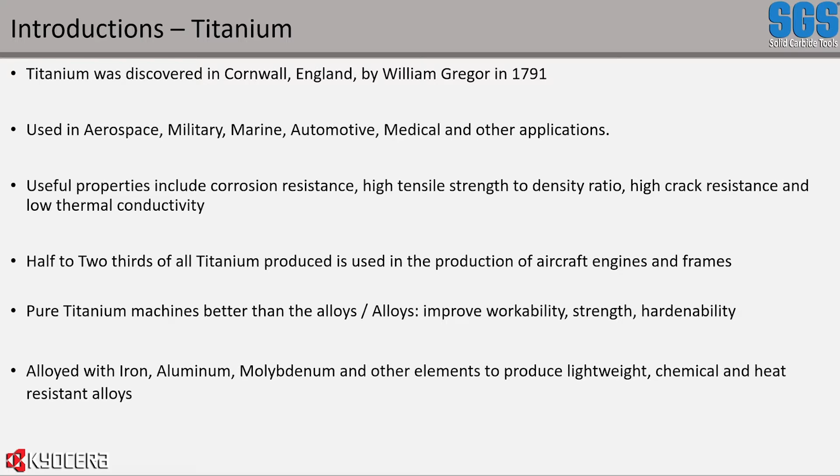There are 3 different phases of titanium, which we'll cover in a second, but there are many different groups within that as well. The composition of these materials can vary, producing different properties that are advantageous to specific applications.

The first phase of titanium alloys is the alpha phase. This is pure titanium. It's pretty easy to machine in terms of titanium, but it does lack some of the good things that the alloy phases do give you. These generally don't respond well to heat treatment, are very weldable, and are commonly used for airplane parts, as well as more temperature variation parts, so chemical processing and cryogenic applications really lend themselves to those niche areas of manufacturing.

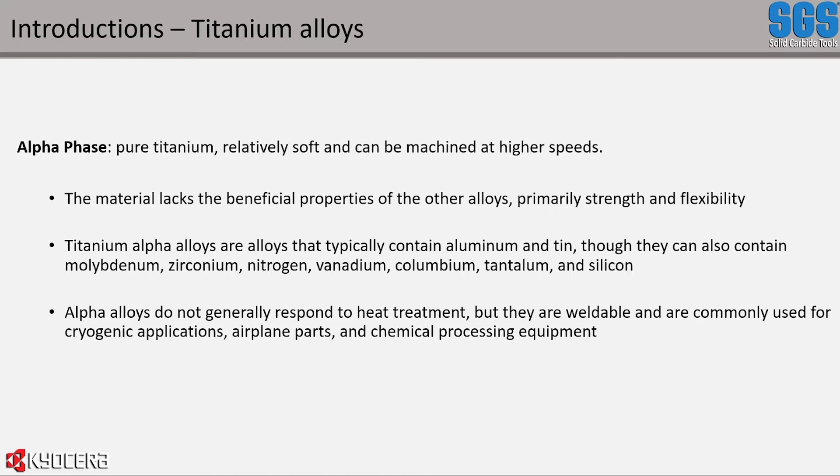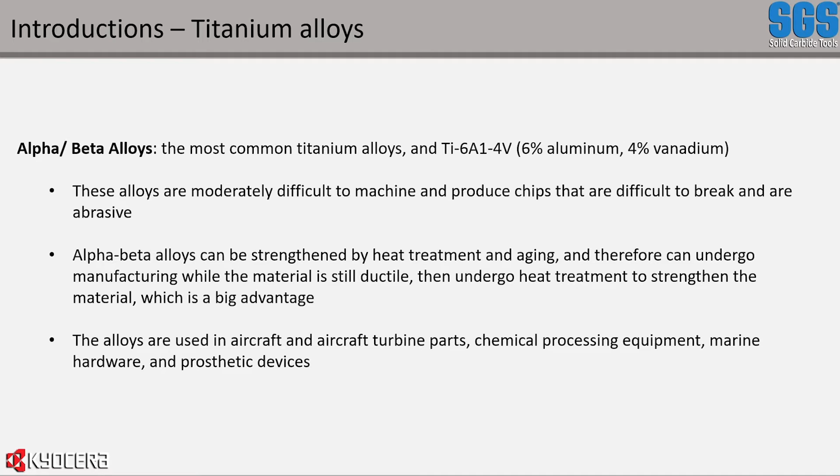The second phase is the most common: the alpha-beta phase. The most common titanium of all is the one most people are probably familiar with, Ti 6Al4V. This is a widely used material in the aerospace industry. It's great for engine components, airframe structures, landing gears, and it's also got great corrosion resistance, so it's good for marine applications where you're encountering salt water often and other chemicals that would otherwise affect other materials negatively. The final phase is the beta phase.

These are harder versions of titanium. They have higher levels of molybdenum and vanadium in them, which does make them more difficult to machine. They are becoming more common, especially in aerospace, as engines are developed to run at higher temperatures and higher pressures, so that requirement for higher material properties is increasing constantly. They're also used for heavy duty purposes on aircraft.

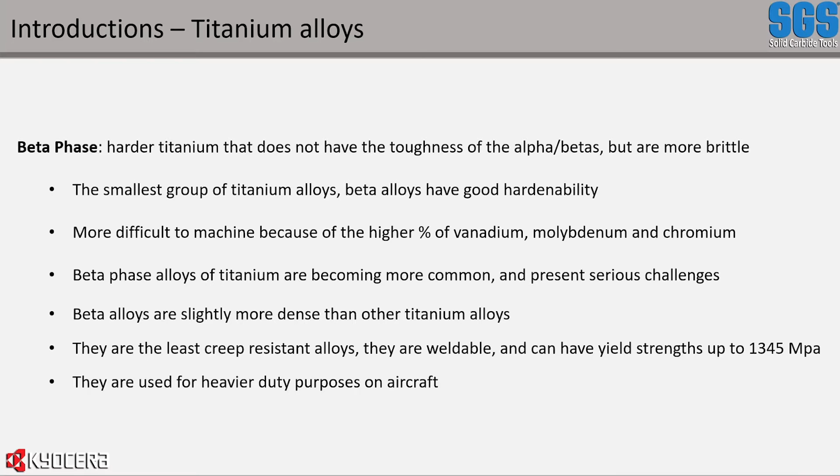As mentioned, there's a wide range of titanium materials out there, and these are just 5 relatively common versions of titanium that you'll probably come across and have worked with in business. 6Al4V is the most common, used in aerospace, sports, and marine applications. There are some automotive applications too, but this is more for high performance, racing, exotic car type applications.

Ti 6Al4V ELI is a more medical-specific version of 6Al4V. This has better compatibility with the human body, so there's less chance of any issues of non-compatibility with the human immune system. This can be used for skull plates, brackets and pins for holding bones together, and joints as well.

Ti 3Al2.5V is a heavier version of titanium. Again, this is a really specific material for applications where high heat and high chemical exposure is common, and it lends itself to pressure vessels and heat exchangers, for example.

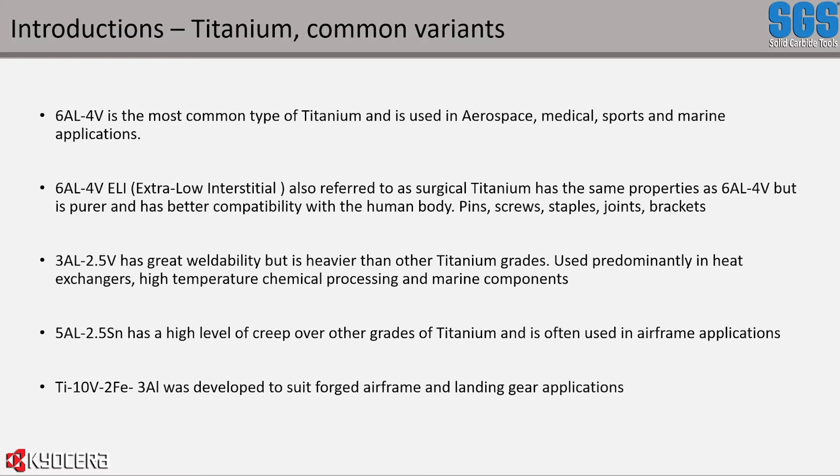And finally, Ti 10V2Fe3Al. This is for forged airframes. This is a really heavy duty titanium. It responds well to being forged and has excellent toughness, so it's great for landing gear applications, especially in heavy duty, large scale aerospace. Think your Airbus A380, Max, and your big military application aircraft, where we're moving lots of cargo around, and the planes are built to that sort of scale.

So moving into how you approach machining titanium. Machining titanium, as many of you know, is not an easy thing to machine. There's many variables, and we're going to cover some of them now. We're going to review some of the tooling, some of the methods, and how to apply our tools in certain ways to get the most out of it. But before we get too into the specific tools, I wanted to cover some of the background information on the tooling to show why some tools are good for titanium over others, and give some information about the design of tools.

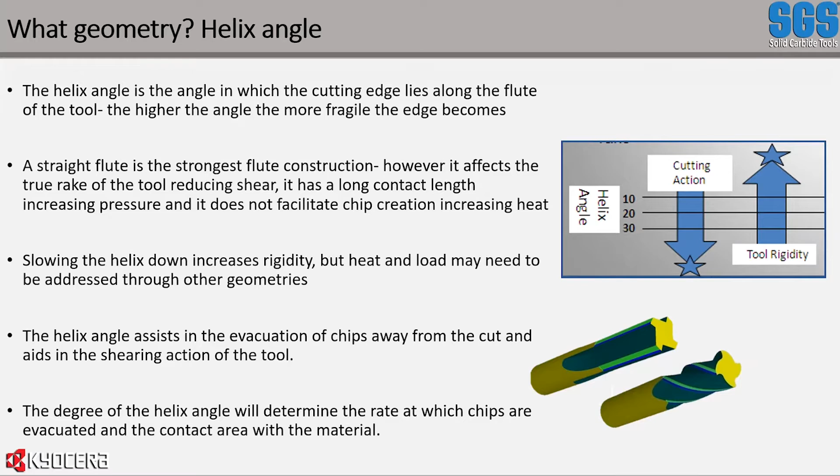When you talk about rake angles, we can have positive and negative rake angles. Generally, the higher the angle of the rake, the less power is needed to remove the material, because you get that increased shearing action. The lower the angle, the more strength you hold back in that tool, so you've got a bit more brute force to get in there and do some aggressive roughing, slotting, pocketing, etc. That helps get those chips cut, cleared, and evacuated quickly without causing any recutting or excess heat going back into your chips or your tool. So there's a fine balance between what angle you use for what application, and we'll discuss this further when we get into some of the details of the tools.

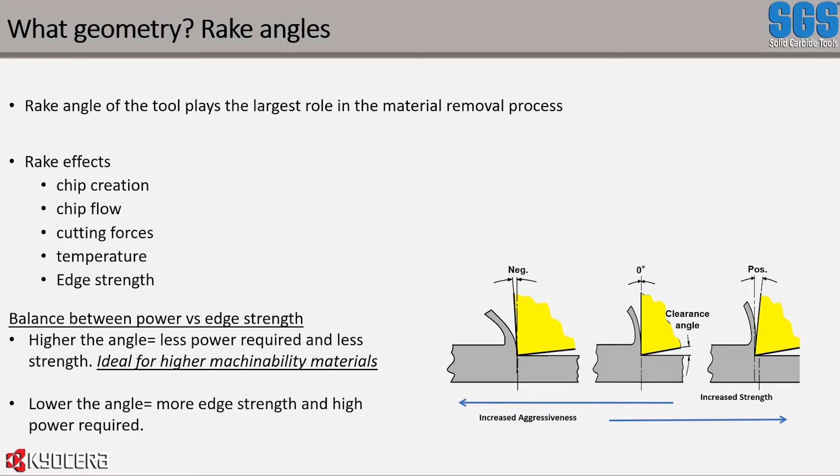Number of flutes. This really depends again on your application and what you're aiming to do. Are you aiming to get material out quick? Are you aiming to take a large chunk of material out, or are you looking to finish a thin wall, for example? This can lead into how you go about picking what number of flutes you want for your material. You can also go odd number of flutes or even number of flutes, oddly spaced or evenly spaced. There's many different types, and how this decision is made comes back to what you're doing. The lower flutes you have, the more room you have to make a big chip and get those chips out of your cutting area. This is great for slotting, heavy duty roughing, traditional profiling passes, where all you need to do is get that material out. Surface finish isn't as critical, and you're looking to get close to a semi-finished surface. So you want to go aggressive, get the chips out fast, and go for a lower flute count.

When it comes to lower flute count tools, you've also got to consider the harmonics of what you're doing. If you've got an even number of flutes and they're equally spaced, you've got a potential issue for chatter generation, because you always have two flutes coming in and out of cut. You get that repeating knock-in effect where flutes are engaging and coming out of cut, which can cause issues. If you have an odd number of flutes, you avoid that, because you've got one flute engaging and one flute coming out of cut. So the harmonics are affected positively, because you're distributing that harmonic effect that can get amplified and cause tool failure, chatter, poor accuracy, and reduced tool life.

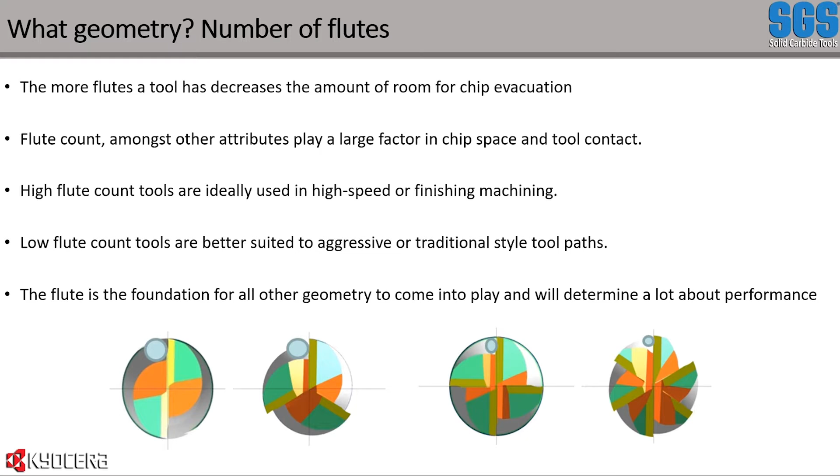There are tools that will do a roughing and finishing operation, we'll cover that shortly. But there are some tools where, if all you need to do is get to a rough profile, or you have quite wide tolerances on your components, a lower flute count tool going aggressive may be the way to do it. But again, it comes back to the entire setup, not just the tool you've got to focus on.

When it comes to the relief of a tool, this can be determined by the tool you select, and whether you are roughing or finishing. If a tool has an eccentric relief behind the flute, you get more meat and strength behind that tool, which lets you cut more aggressively because you've got that extra material backing up the face that's cutting and engaging into the tool. This gives you extra strength for aggressive roughing without causing issues to your tool.

If you go for a faceted relief, you get a really sharp cutting edge, so great for light cuts, really fast, great for really light finishing and softer materials. The eccentric relief, again because you've got that extra meat, is great for harder materials.

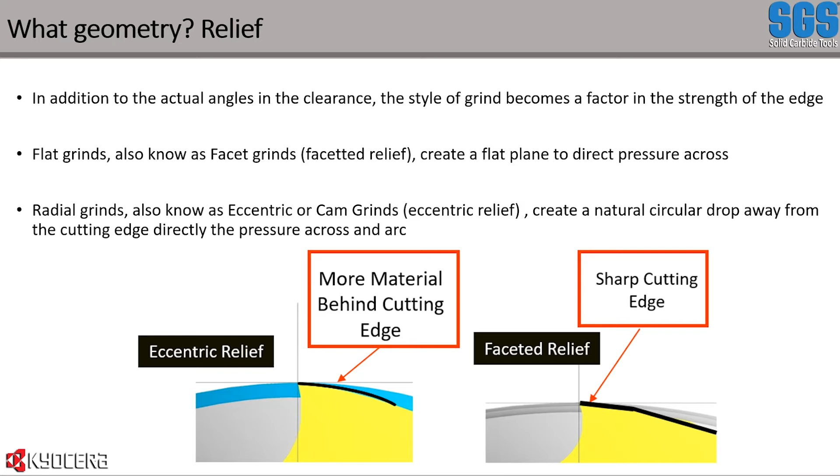So this comes back to, as I mentioned, what is the right tool? What are you aiming to do? Are you roughing, are you finishing, or do you want a tool that does both? Are you slotting, pocketing, or profiling? Do you need to plunge? Can you helically ramp? Do you need long reach tools? Have you got a fixture setup or an application with a really deep pocket or a difficult surface to reach that you just can't get to with a standard length tool?

Do you need chip breakers? If you're pocketing and you haven't got sufficient coolant to help evacuate your chips, do you need chip breakers? Rather than doing a 1 inch length of cut and getting a 1 inch length piece of swarf, can you use chip breakers to cut that swarf down, making it easier to evacuate using coolant or air?

Are you using high-speed machining techniques or more traditional methods? Are you just going in there and profiling round, not cornering around your component, doing straight 90-degree corners? Again, this all comes back to how you apply your tool and what method you're using.

If all you are doing is a square profile around a block with really sharp corners, titanium doesn't like that, and neither does your tool. You're rapidly increasing and altering the direction of force applied to your tool in those corners. If you can put a radius on each corner, not only will you increase your tool life by balancing the cutting forces applied, you'll also get a more accurate component, and it'll be way easier on your machine tool as well.

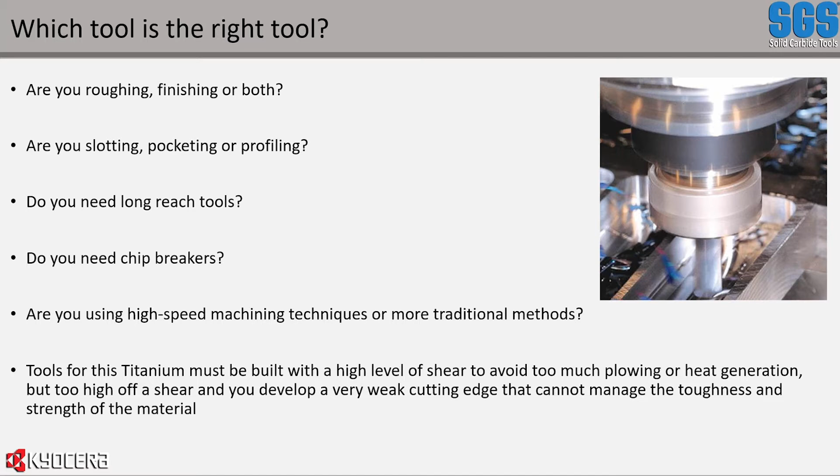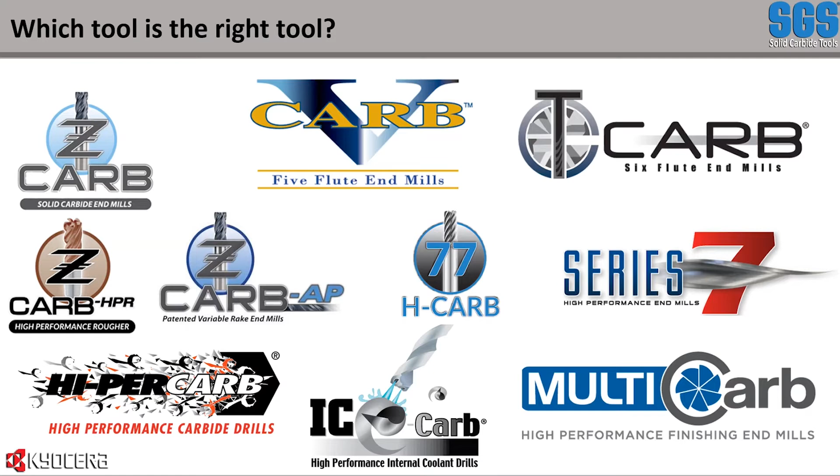So there's multiple ways of determining how you go about selecting a tool. So which tool is the right tool? Now, on this page there's a number of our tools. I'm not going to go through all of these, don't worry, this isn't a giant sales pitch on every tool. We've got finishing tools, roughing tools, multi-purpose tools, 2 drills in there, and I'm just going to give a top level introduction to the more common ones and how they're used and what they're best used for.

But we'll start with drilling. So we've got the Hi-PerCarb. This is a twin flute, secondary flute drill.

It can drill 3 or 5 times D. It comes with a Ti-NAMITE A coating, which gives you excellent heat protection on your carbide. And the double fluting gives you great stability in hole drilling, because you've got that extra flute behind your cutting flute to help stabilize the hole. You've effectively got 4 points of contact over 2, so this allows for excellent rigidity and stability.

You also get an increase in circularity and accuracy through a burnishing effect from the secondary flute that helps guide that drill down to the right diameter and the right path. It also allows for coolant to enter down into the drill area to help evacuate those chips. You get the chips out there, you increase your tool life, you increase your accuracy.

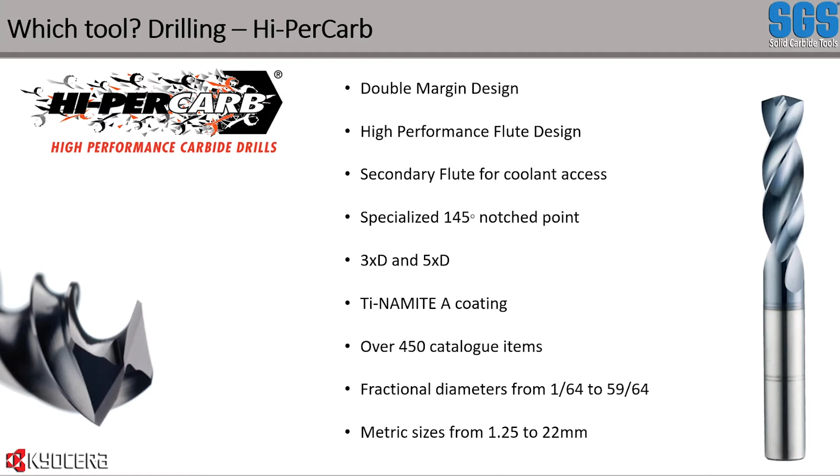This tool is available. We've got over 450 different options for this tool. They come in fractional sizes and metric sizes, and it's a great tool for using day in, day out, to give you a repeatable hole.

The second drill that I want to discuss is the Ice Carb. Now, this is a through coolant drill. It's great for the deeper 8 times D holes, or areas where you really want to get the most out of tool life, or you don't have great flood coolant access. So if you're creating a hole that's inside a pocket and you're using flood coolant through nozzles that you just can't get positioned right for your drilling, this is a great opportunity to maximize efficiency through using a through coolant drill.

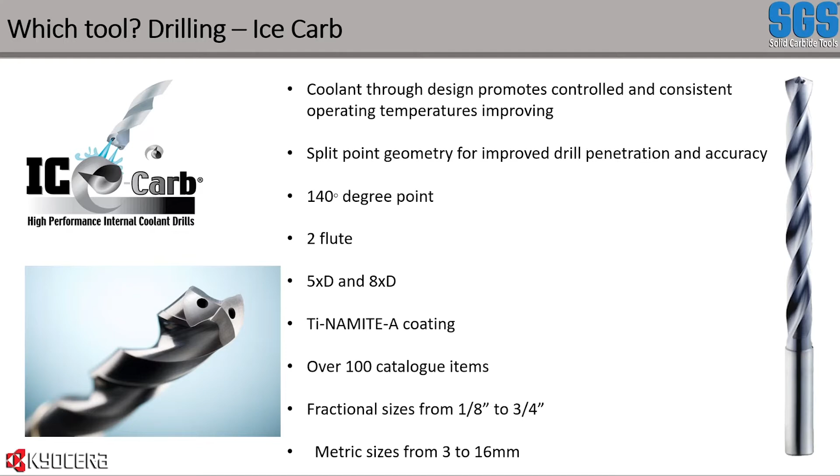As you're aware, you drill into your hole, and the coolant is coming straight out in the bottom of the hole, flushing those chips straight out. So you get great tool life with this drill, and it's just great for those applications where you just can't get enough coolant into your cutting hole.

So Zcarb HPR, I love this tool. I've used this tool probably more than any other tool that we sell. There's over 800 different options of this tool. It comes in fractional, it comes in metric. You can get it with a square corner, you can get it with a radius. You can get it with a through coolant hole in certain sizes as well, which is phenomenal when pocketing or slotting. It's got a very big core, which gives you great stability, and it's excellent for profiling.

So you've got all the right geometry here that gives you great efficiency when rough milling. You've got the 5 flute odd pattern, they're variably pitched, you've got variable rake, and with a Ti-NAMITE-M or even the Ti-NAMITE-A coating, you get excellent tool life.

I did a development project using this tool for trochoidal milling, and it gives you a surface finish that's fantastic at very aggressive rates. In fact, later on, I've got a slide discussing coatings that will show the application of this tool.

You can also use this tool for finishing. It's called a high performance rougher, but it does work well as a finisher as well if you're limited on your pockets on your machine. So you've got no worries about just altering your feeds, altering your parameters, your AE, your AP, and you'll get a great surface finish with this tool as well.

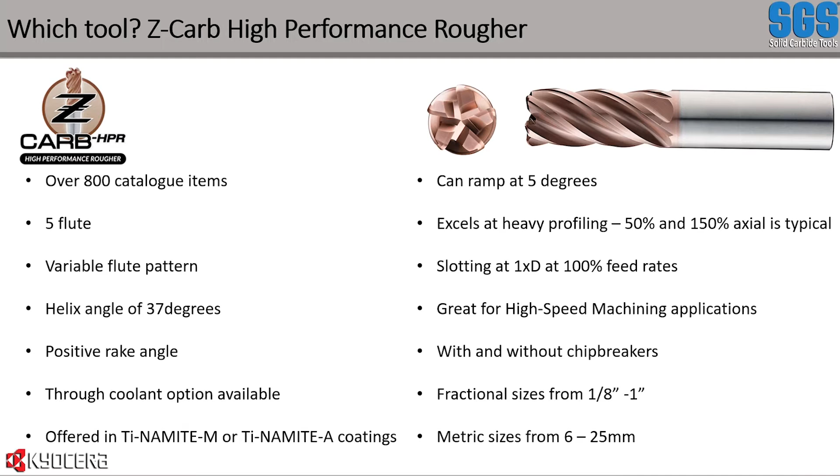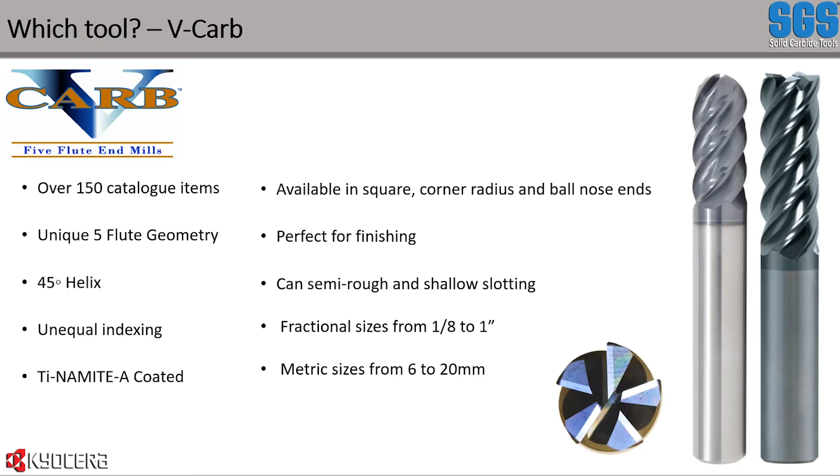The V-Carb, this is perfect for finishing. I'm sure some of you have come across this tool before. It's got, again, the great geometry, the unequal indexing, the right helix. You can get it in ball nose, square, and it's a very, very useful tool. You can do roughing with it, but you've got to be careful not to go too much radial engagement. And again, just a fantastic all-around tool that excels at finishing.

The T-Carb, this is a 6 flute end mill, unequal indexing, center cutting, great for trochoidal milling, great for helical interpolation into pockets, take really light radial passes, high AP passes, axial passes, and you can really ramp up your parameters and get in there and get that material out. It's great for pockets because you've got that extra length of cut in there that you won't have with some of the Zcarbs or the V-Carbs.

You do completely different programming to how you'd use a Zcarb. So this is really high efficiency. As I mentioned, high AP, low AE, get your parameters ramped up, and you can profile around a component all day with this tool. It's fantastic.

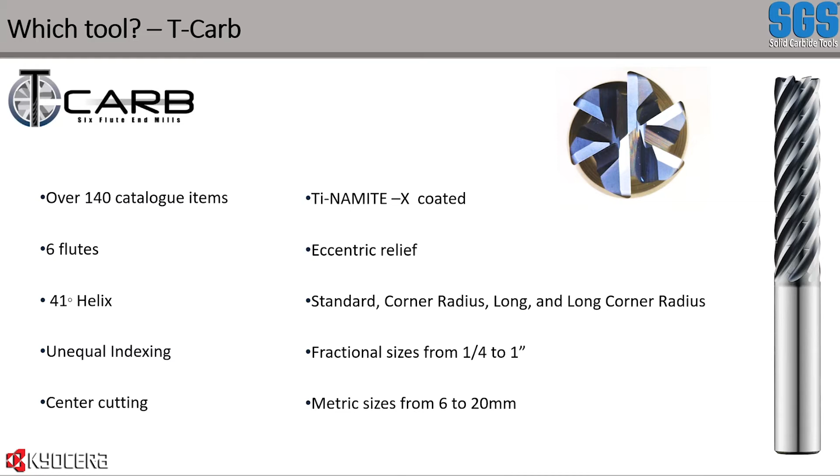It aids with chip evacuation. You don't get the swarf clogging up in your machine bed, and you don't get it clogging up on its way out on the conveyor. So it just makes everything really, really manageable.

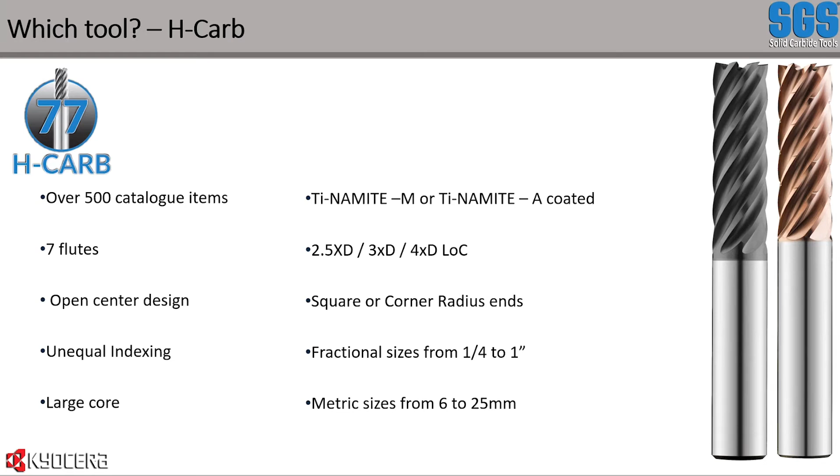It also comes in a wide range of axial lengths of cut, up to 4 times D, which is great, especially if you've got a big 3/4 inch or inch end mill. You've really got a long length of cut in there that you can take advantage of and really work that tool efficiently. It needs to be worked hard, but it works really well in very high speed machining applications where speed is the name of the game. This isn't a tool for slotting, but if you want to do fast machining, this is perfect.

A lot of our other tools, like the Zcarb, which is just a 4 flute, have 2 levels of chatter suppression. If you're using a Zcarb and you're still finding you're getting chatter in certain areas, an AP might be a good option to swap out and try, because you've got that extra level of suppression that helps increase tool life.

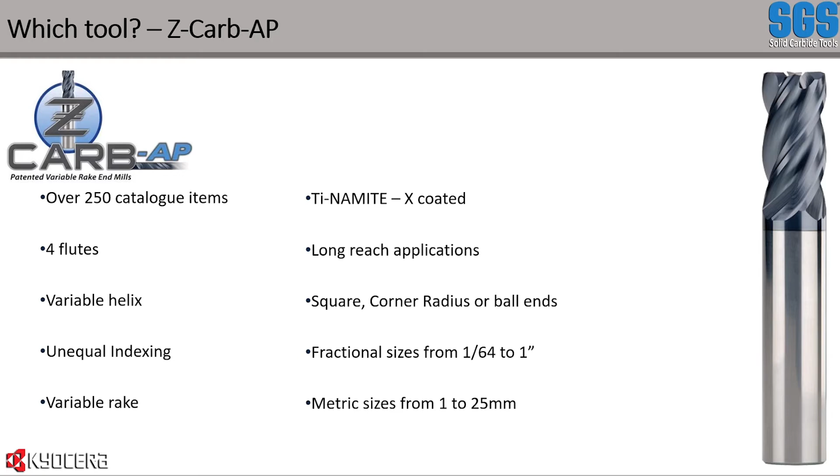And that's it for the tools. So we'll come to talking about coatings now.

So Kyocera SGS offers a wide range of coatings, but the 3 I wanted to cover now are our Ti-NAMITE A, our Ti-NAMITE X, and our Ti-NAMITE M. In any application you can use these coatings, and you'll find that one excels and the other two work well, but you'll always find one that works great.

In the tool development project that I did, we used Ti-NAMITE M exclusively, and we got excellent tool life. We never had any issues with built-up edge or adhesion. We got great thermal protection of the tool to reduce chipping. It was fantastic. That's not saying that A and X are bad.

It's just how you apply them into your application. Working with the applications engineers from Kyocera SGS, or the sales engineers from SGS, and also considering which tool you use, will be able to steer you into the right path of which coating is best for your application.

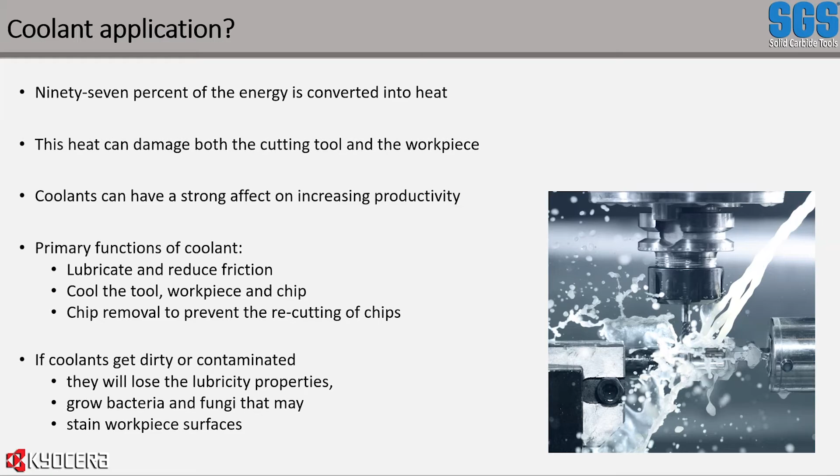However, if you don't want to use an open collet, or you don't have great access to your cutting area because of fixturing, or the area you're machining is deep inside a pocket, Kyocera SGS offers Jetstream slots.

This is a coolant application system where you can use a sealed collet on your tool, and as long as you've got through-tool coolant spindle capability, you can use these tools to get coolant right at the cutting edge.

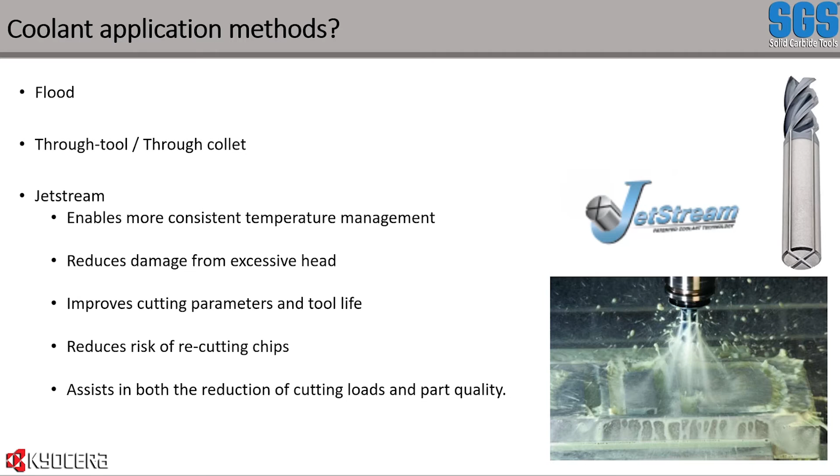So we talked about the tools, the geometry, the coolant. Now let's talk about how to get the most out of your tools through intelligent programming. You can program very traditionally - straight engages onto corners, engage into pockets. But the more intelligence you build into your programs, the better you will be all round. You'll get improved tool life, improved swarf control, improved geometry of your components. You'll reduce tool failures and increase productivity.

A more intelligent way to do it is to walk into the cut. Don't just directly engage, arc into it. If you are cutting a rectangular block of titanium, don't just feed straight into it from one corner. Arc round it, build into the cut. Gradually increase that force applied to your tool until you've got it fully engaged to the depth of cut you want. Your tool will thank you for it, your component will thank you for it, and your machine tool will as well. You'll get that gradual increase, your tool will bed into it, and you'll start cutting, and everything will be better.

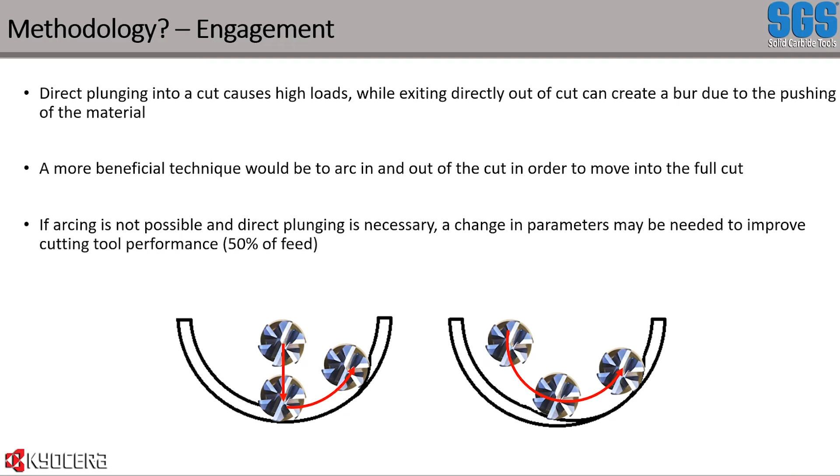If you are forced to go straight into cut, as per the image on the left, just drop your feed 50%. You'll ease the tool into cut a bit better. It'll give you time to just settle in before you set off profiling around your component. As soon as you're in and at your required radial cut, turn that feed back up and away you go. But it's still not as good as arcing in and arcing out of your cut. That sudden increase of cutting force or sudden release of cutting force can cause damage to your tools.

This applies when cutting corners as well, and the size of tool you're using. If you are cutting a half inch radius, don't use a half inch tool - step down to a smaller diameter. As per the image on the right, if you have a half inch tool, cut bigger than the corner you require, leave the material in there for a later operation, or use a smaller tool but go high efficiency machining. Sure, you might go from using a half inch or three quarter inch end mill for aggressive roughing, maybe step that down to a quarter inch or half inch and go light and fast, peeling away that corner, keeping your radial engagement to a sensible amount.

You'll keep your cutting forces stable. You won't wrap around in that corner and increase that cutting area contact angle massively, which can cause chatter. It may damage your tool, it may even cause your tool to fail. If the swarf gets jammed in there, you're cut and you're out of the game. So use your programming capabilities in CAM to your advantage.

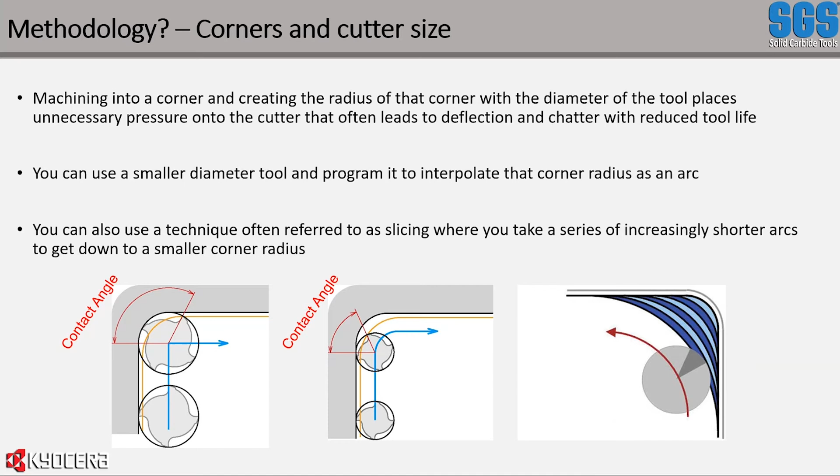As I mentioned earlier, if you're profiling round a boss, don't use square cut, don't use 90-degree corners. Ramp round instead. It'll keep that cutting force consistent and gentle for your tool, and it'll improve your productivity no end.

A lot of you probably know about high efficiency machining, trochoidal milling, getting the most out of your tool. This is moving away from traditional machining methods, taking advantage of your CAM software that allows for advanced machining capability. It's all about using the most efficient milling methods possible. Yes, you can slot and then profile, but it's heavy on your machine tool, heavy on your tool. It can cause chatter.

If the application isn't right, if you haven't got a really stable setup, slotting can cause you no end of problems. Yes, you can drop your axial depth of cut and take multiple passes, but as the old saying goes, time is money. Why try and aggressively do something that can cause damage long-term to your machine tool, your component, and the tool, when you could use some intelligent machining methods such as a trochoidal path to get in there and go really fast, really light, really easy on your tool, and cut all that material out without causing too much stress, strain, or problems to your machine.

This method of trochoidal milling, using constant cutter engagement, gives you lower heat because you're coming in and out of cut, but gently. It builds into cut, you reach your maximum radial cut, and then you're already coming back out. Yes, you may need to go down and do a finish pass after, but if we're talking a quarter, 50 microns depth of cut, you can simply go in and out of your slot really fast, really light, and get an excellent surface finish.

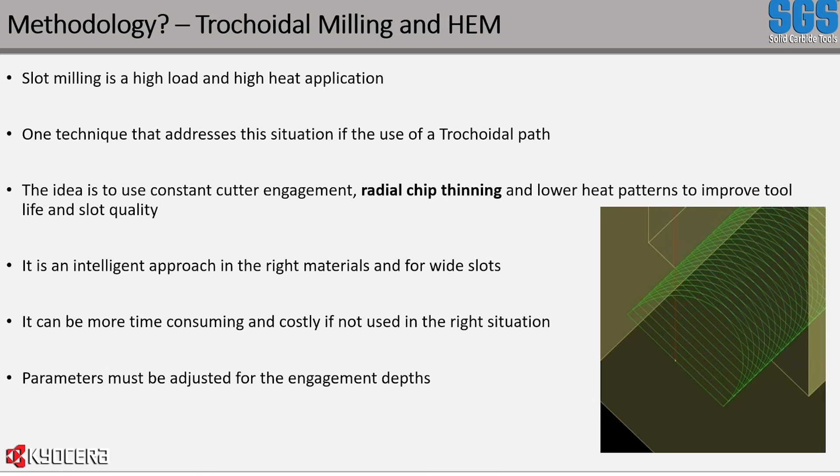If yes, well, then what's the cost of the tool between a high efficiency milling tool such as a T-carb versus a more aggressive tool that you could use, such as a Zcarb HPR, and just slot? You've got multiple options. So never just think, well, SGS said you've got to use a high efficiency milling method. Sometimes you can just do a full slot and you'll get away with it, but you've got to tailor each thing to your solution. Each application is different. What works for one company won't be correct for another. So it all depends on the job, the machine tool, the fixturing, the coolant, and the cost of the component at the end of it.

When it comes to using these high efficiency milling programs, or you are profiling around a machine tool, your engagement angle of your component can change. If you are machining around a profile, for example, and you go into a corner, your engagement angle increases because you get more wraparound. As you come to the outside of a corner, if you're profiling around a boss, your engagement angle decreases.

So what you've programmed as your feed per tooth is not actually what you get. Inch per tooth is not what you're getting, because your chips are varying in size. When you're going along a straight path, you're getting the exact parameters you programmed at. But when you go around a boss, you're cutting less, so your tool can start rubbing instead of cutting. If you're not cutting and you're just rubbing, then your heat is going to massively increase. Your tool life's going to fail and your part quality is going to suffer for it.

So what you can apply is what we call chip thinning. Can you utilize a higher feed rate and improve your production time by taking advantage of varying your cutting engagement? If you go into a corner, you've got to slow down.

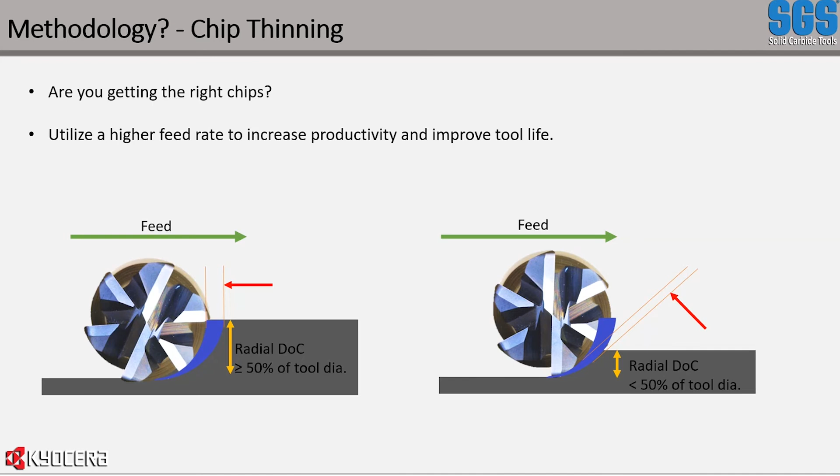If you're doing the programming and you've already got the program on the machine, you don't want to go back into your CAD CAM software. On the Kyocera SGS website, we have a calculator that works it out for you.

Now, I can't in this presentation give you a set of parameters and say this will work exactly, because this is exactly what our book says. Please refer to our book, refer to our Tool Wizard which I'll come to later, talk to our sales guys, talk to the application guys. Depending on what you're doing, how you set up, what machine tool you're using will affect how you set your parameters. Proper speeds and feeds take experience and experimentation to determine - I cannot agree more with that statement. Just because you run at one set of parameters doesn't mean you can go 10, 20, 30% faster. Some applications you're going to have to drop that down, but you've just got to get in there, examine your application, and determine what works.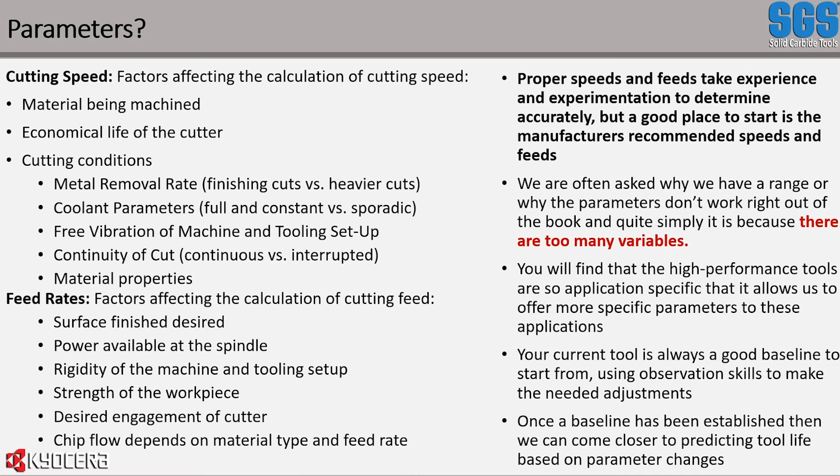I'm just going to go through this quickly. I realize I'm getting close to time, and I have several slides left, and we want questions at the end.

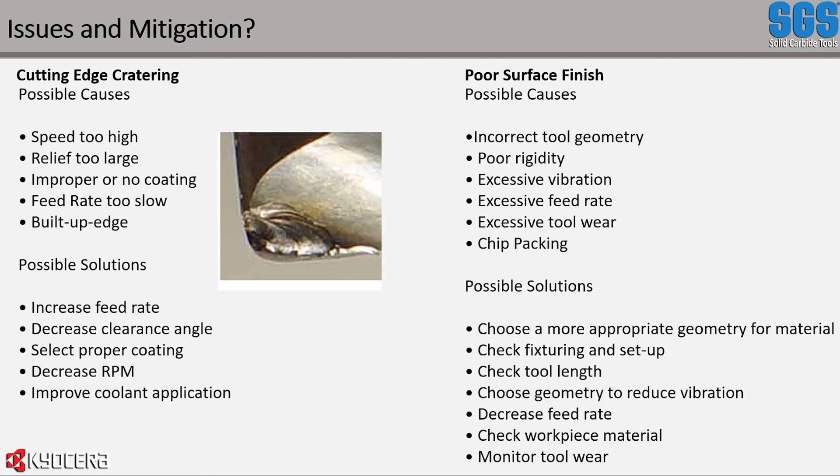So what happens when you encounter tool failures? You've got possible causes and possible solutions. It could be that you're getting cratering on the ends of your tool - this could be any number of issues causing that. But there are other solutions and probable issues you'll encounter where you can say, okay, the speed's too high and the feed rate's too low, which matches with the other issue we're having with built-up edge, for example. So solutions - there's more than one way to fix this issue. You can alter your parameters, improve your coolant access, swap out to a bigger holder, or reduce your stick out. There are always ways to improve and mitigate issues.

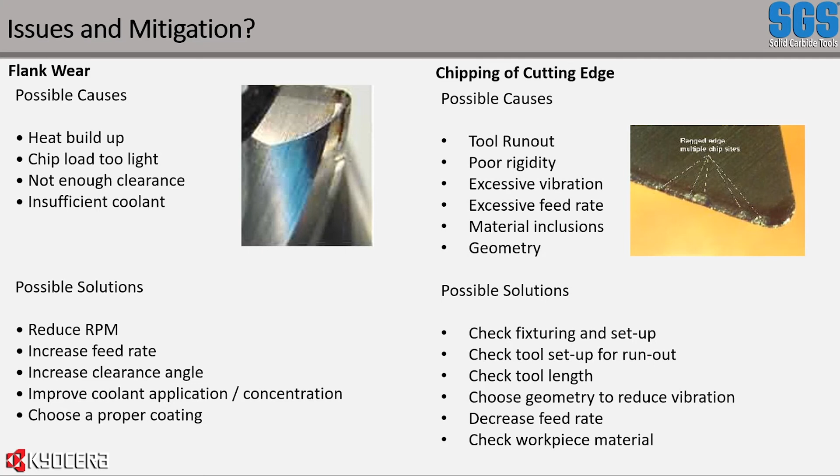So for example, as I mentioned in the earlier case study for coatings, you got chipping on your cutting edges. Well, some of your causes could be run out - put a clock on your tool and make sure it's running within the holder's limit. You could have an excessive feed rate. It could be as simple as this tool doesn't have a coating on it - try a coating, try a different tool. Talk to the applications guys and the sales guys. If we don't know the exact answer, I guarantee you will be able to find somebody who does, who's come across this issue before and knows how to find a solution that will work. There are many different options when it comes to fixing things and diagnosing these issues.

The built-up edge can be a big issue in titanium. That again can come down to running too slow, overusing your tool, or inefficient coolant. There are many ways to fix that issue of built-up edge. So if you have an issue, just take a step back, look at the overall application. Have I got coolant in the right place?

How long has this tool been running for? Has it got a coating? What are my parameters? What works on another machine that doesn't work on this machine? Is it the machine? Is it the fixturing?

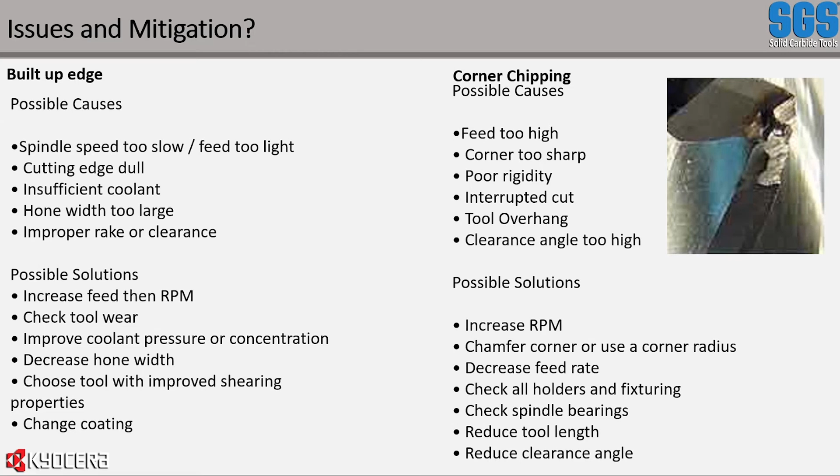There are ways to just diagnose each of these issues and find a sensible resolution that doesn't cost you downtime. If it's a case of running too slow, you can adjust your feed and speed 10%, 20% on your machine controller, depending on which machine tool you're using.

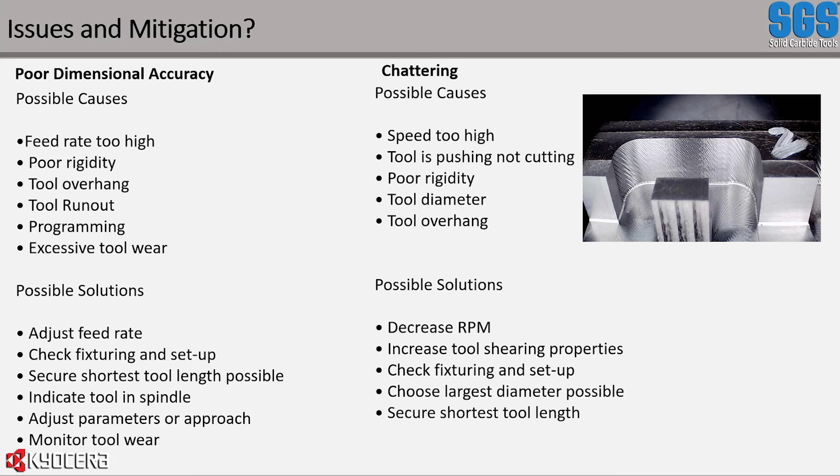If you're running your tools to this length and you're getting this issue, it can be caused by several things. You might have just run it for too many slots. You might have too aggressive parameters. You might have your chips not evacuating correctly because you're not getting enough coolant in there, and that can cause them to jam, and then you just twist your tool off and you've potentially scrapped a $10,000 to $250,000 component, and nobody is going to be happy about that.

Make sure that when you are running these tools, you apply logic to them, you gain from your experience of running them and say, right, this tool has run for an hour, full slotting, that's it, it's done. It's run for half an hour doing X, it's done. Back it off, put a factor of safety in there.

If you can give us a worn tool that's not badly damaged, we can regrind it for you. A reground tool is 98% a brand new tool, it's just a bit shorter. We'll recoat it for you, send it back out to you, and it's something we can do with a lot of our tools. A really efficient way of getting the most out of a tool.

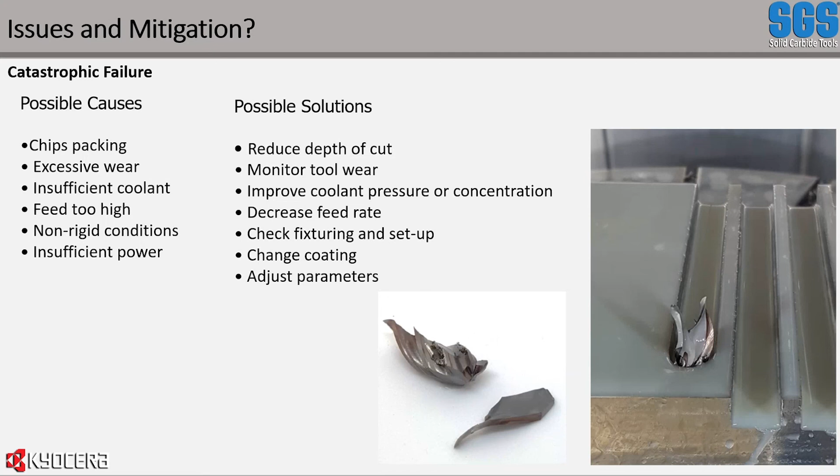What you can also do is refer to our website, kyocera-sgstool.com. We have case studies there. So you go to resources, drop down to case studies, and you can find case studies by material, by industry, or by tool series.

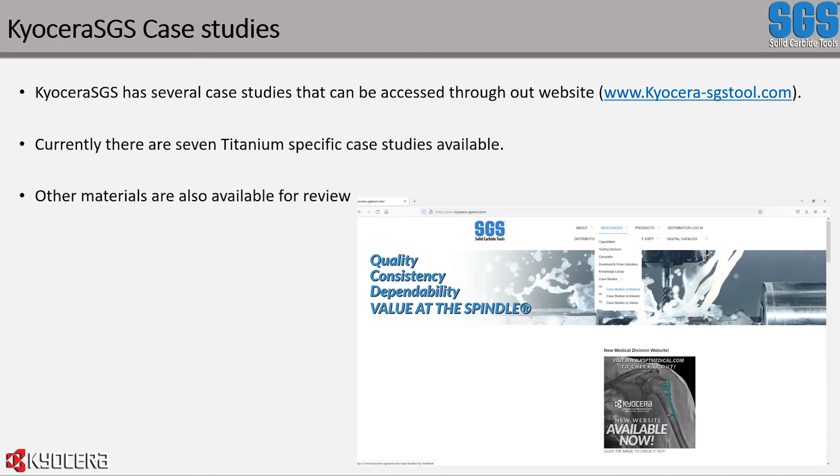For the titaniums, we currently have 7 all available using different tools, different applications, with different results. These are real world applications where we have worked with a customer who has a current engineering issue. We have come in, worked with them, and just given them guidance to say, you're currently doing this, let's try this, let's increase this.

Let's put a coating on this tool. Let's increase the depth of cut axially, but drop it radially. These are real world case studies. This library is being built all the time, and there is plenty of research out there that we can help you with. So in summary,

you've got to know which material you're cutting. Your titaniums, there's different grades. Now you can get away with using generic titanium parameters for a lot of these, but some are different. If you go from cutting Ti 6AL4V to cutting Ti 10V 2FE 3AL, you've got to use different parameters. It's a different material, it's got different properties, it's more aggressive on your tool. You've got to tailor your solution.

Know your limitations. If you're running on a small machine tool that's got a small holder, low pressure coolant and limited spindle capability, you can't be pushing it at 120%. You've got to set up your system for its limitations. If you've got a giant DMG or another big 5-axis, big head, high pressure coolant machine for example, you can go more aggressive, you've got that stability in there.

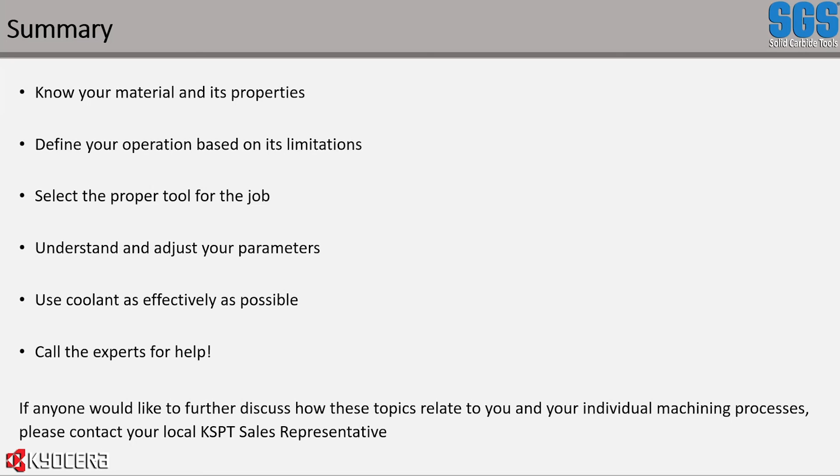I'm the applications guy for the East Coast. If you're on the West Coast, reach out to Chris Dixon, he'll help you with that application. If you're in the middle, reach out to Scott Suckup. He'll help you. Between the three of us, plus our sales team and our R&D guys, we'll be able to find a solution for you.

The last thing I want to cover is the Tool Wizard. SGS, Kyocera SGS has a Tool Wizard. This is on our website, you can see the link at the top of the page. This will help you find tools and parameters for a massive range of materials.

There's a good range of titaniums in there. What you can do is tell the Tool Wizard what you're trying to accomplish and what parameters you're capable of - max RPM, for example. You can select your material, you can select the type of depth of cut you need, and it will recommend you a tool.

Do you want a high performance tool? Do you want a general purpose tool? It will give you that option. And it'll give you this calculation page, which I've had to cut down into sections on this slide, and it will give you everything you need to get you up and running.

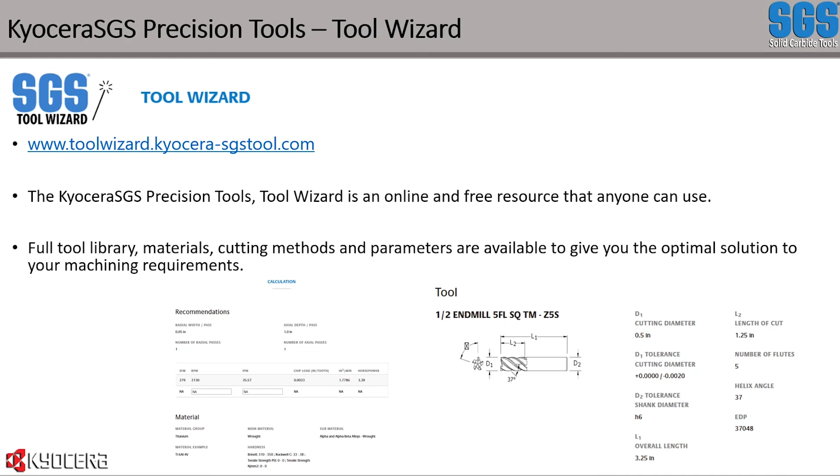This doesn't mean you can't adjust these parameters. If you set it going and you get chatter because your fixturing isn't perfect, drop the parameters 10%, or increase the parameters 10%. Sometimes just moving past that frequency of vibration will get you going again. So use this as a guide - it'll give you a great indication of the tool you need and the parameters you need to use.

And that's me. I hope you enjoyed this webinar. If you have any questions, I know we're a bit short on time now, but I'd like to open it up to questions.

No one? Hello, this is Tan from Singapore. Thank you, Andy, for the presentation.

I'd like to ask, in one of your slides which shows the chip thinning calculator - is that available for us to download or to calculate? Yes, if you just go to our website... let me just go to our website and you can go to resources and calculator, and it will be there to help you straight away. We have a couple of different ones - fractional, metric, end mills, and drilling capabilities as well.

So this calculator actually only calculates the optimal chip size, and is slightly different from the Tool Wizard, which gives you the cutting parameters. Yes, sir, so you can put in some parameters to get you started. If you put in your RPM and you know your end mill diameter, it'll calculate your surface feet per minute. You can put in your inches per tooth, and it'll give you your inches per minute. It's just helpful to get all the parameters in front of you of what you may need to use.

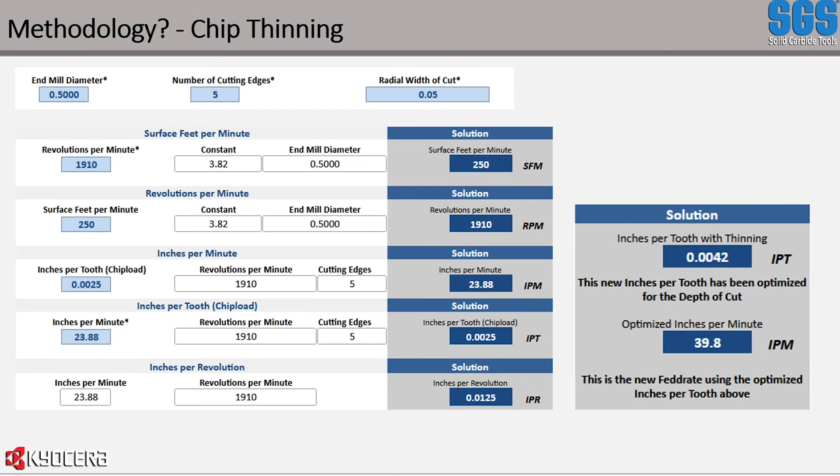It's pretty aggressive, you can definitely go higher. There's no fixed answer - it all comes back down to the application and the setup you have. If you have a really rigid machine and a really well-fixtured big component with thick walls, and you get the right tool in there with the right programming, you can definitely go faster for sure.

Okay, because I think one of the biggest concerns about titanium machining is the heat generation, which may harden the material itself, right?

Yeah, and again it all comes down to the application. If you've got excellent coolant access, you can really ramp things up. If you're struggling to get coolant access, your heat's going to become an issue, your parameters are going to have to change. You may not be able to go as aggressive radially or axially - it's all a balancing act.